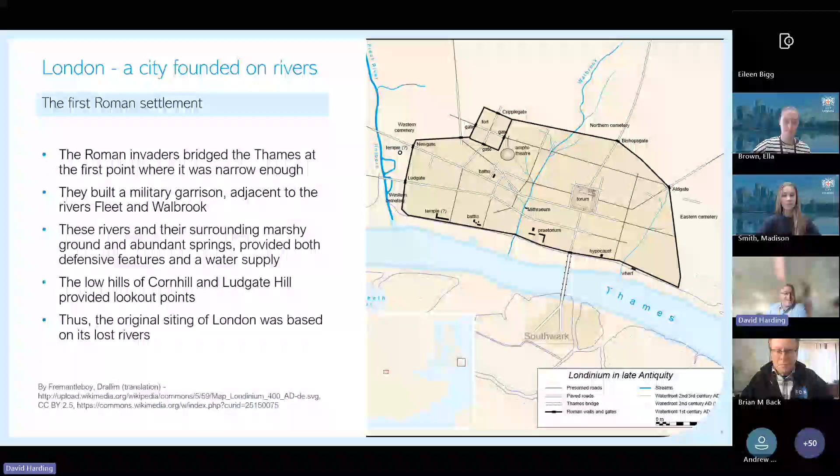So the two rivers and the abundant springs provided a water supply to the garrison, but also the surrounding marshy ground and the rivers themselves provided defensive barriers. There are also the two low hills of Cornhill and Ludgate Hill, which are still just about discernible today, that provided lookout points. So the original siting of the City of London was based upon its rivers.

So starting with Walbrook, two sources are given for the River Walbrook. Springs to the north of the Angel in Islington, which remained a source of fresh water via the White Conduit until relatively far into the 19th century. Also the Holywell in Shoreditch, and the name of Shoreditch might derive from an old word for sewer ditch. The Walbrook joins the Thames at Walbrook Wharf near Cannon Street railway station. Its name is believed to derive from the brook by the wall, after the Roman city wall, which it crossed underneath in a conduit.

Administratively, up until and including the Middle Ages, the city was divided by the River Walbrook. There were 24 wards, but they were referred to as wards east of the Walbrook and west of the Walbrook. So it's an example of how the Walbrook continued to have a major impact on the lives of people living in London throughout a lot of its history.

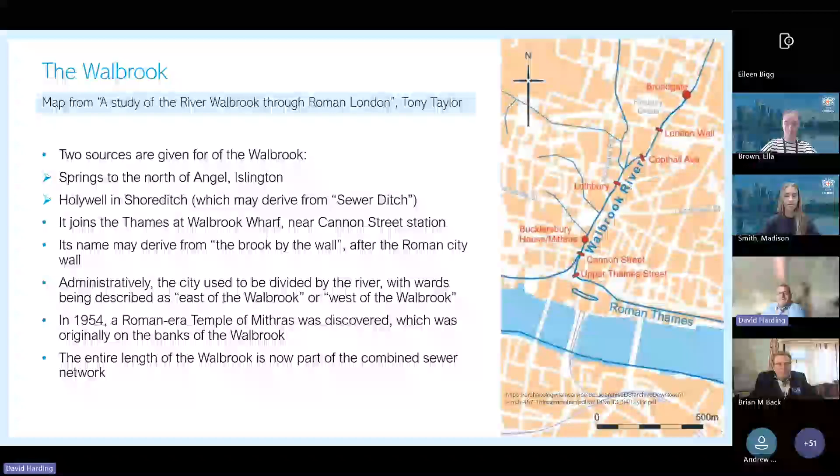In 1954, a Roman-era temple to the god Mithras was discovered, which was believed to have been originally built on the banks of the Walbrook. It's thought that because the cult of Mithras was quite shadowy and mysterious, with all sorts of strange goings on, the secluded river valley of the Walbrook might have provided the ideal location for a temple and for the mysterious rites to take place in. But nowadays, the entire length of the Walbrook is part of the London Combined Sewer Network.

So moving on to the Fleet. The Fleet rises in springs in Hampstead Heath, in an outcrop of sandy heathland soil, which is overlain above the impermeable London clay. It also feeds the famous swimming ponds in the Vale of Health on Hampstead Heath. The upper reaches of the river were originally known as the Holborn, or sometimes the Old Bourne, which gives its name to the modern Holborn area.

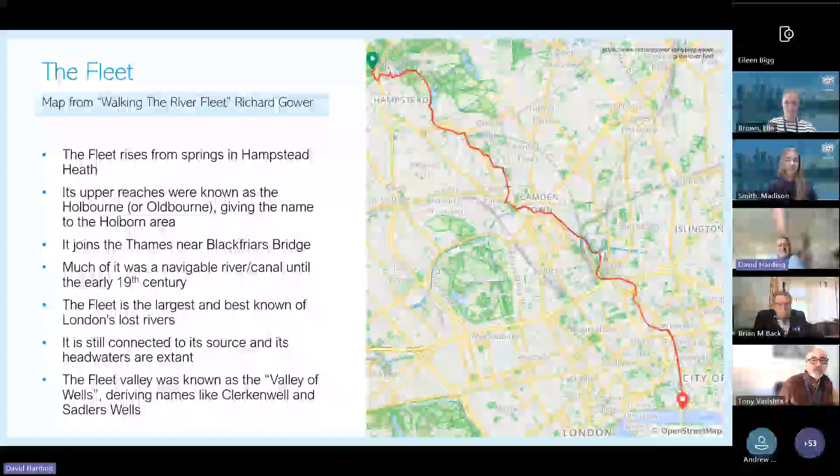And it joins the Thames near Blackfriars Bridge. Much of the river was navigable until the early 19th century. After the Great Fire of London, the lower reaches of the Fleet were turned into a canal by Sir Christopher Wren. And there is a favourite Canaletto painting of ships sailing down the River Fleet into the River Thames.

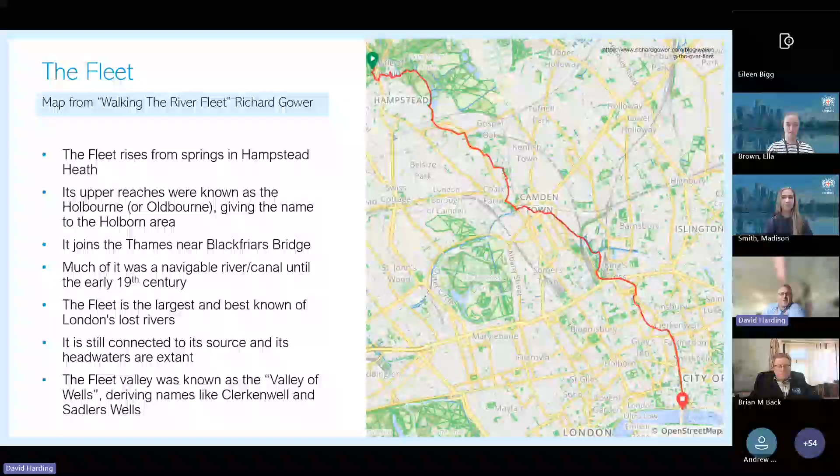It is still directly connected to its sources up on Hampstead Heath, and the headwaters are still extant. You can still see small streams and rivulets on the heath, which feed into the ponds and into the river itself. The Fleet Valley was formerly known as the Valley of Wells, because of the large number of springs along its length feeding the river and also providing water via wells. And modern day place names such as Clerkenwell and Sadler's Wells reflect that history.

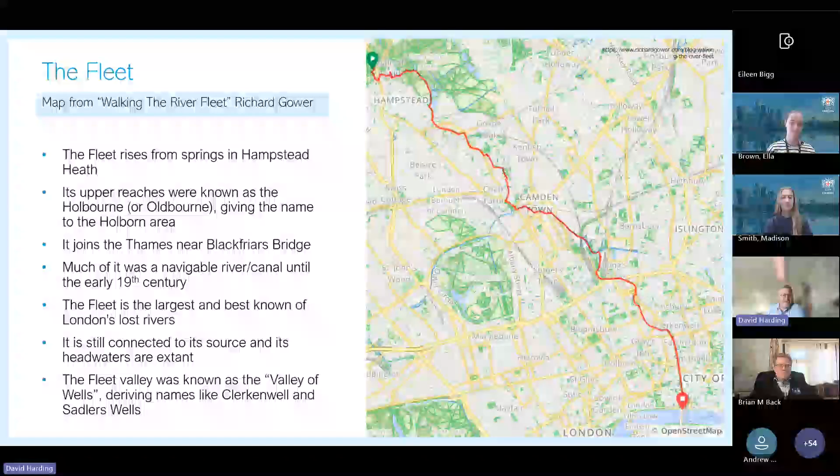The Fleet still has the capacity to sort of bite as a river. During Joseph Bazalgette's re-sewering of London, the Fleet sewer was rebuilt. And at the same time, the Metropolitan line was being built nearby using the same cut and cover technique, whereby you basically just dig a big trench, lay whatever it is you want in the bottom of it and cover it back over.

And then in June 1862, there was a very large storm across London, and the Fleet burst its banks, such as they were, or burst its pipe into the excavations. And the floodwaters were so great that they inundated the nearby Metropolitan line trench and much of the Clerkenwell area.

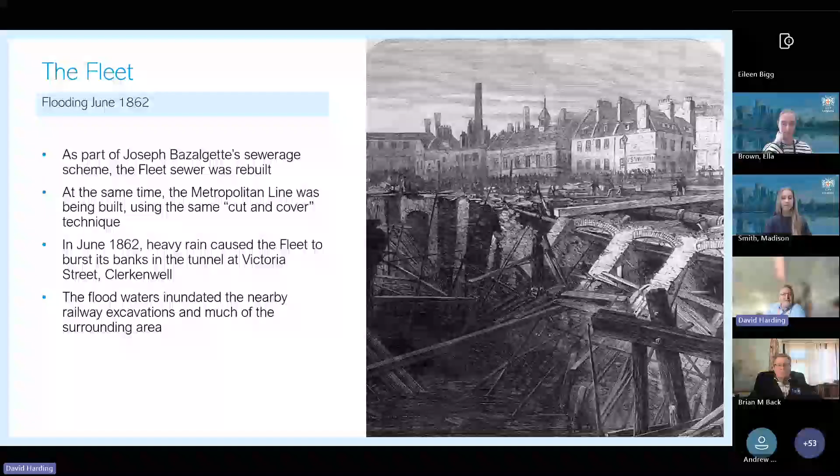And thirdly, the River Tyburn, which also rises from sources around Hampstead Heath in that same sandy outcropping, and a place called Shepherd's Well, and also a source in Belsize Park. It's often confused with the Tyburn Brook, which rose near Marble Arch, which was named after the infamous Tyburn hanging tree, a place of execution, which stood near modern Marble Arch.

The Tyburn is a good example of just how much the rivers and the water of London have been modified, because you have a watercourse which flows in a pipe in an aqueduct, which crosses above the Regent's Canal, a man-made watercourse. To my knowledge, there are no longer any roads named after the course of the Tyburn, but Oxford Street was formerly known as Tyburn Road, and Tyburn Lane. The river also flows through the grounds of Westminster School, where it's long been associated with King's Scholars Pond, which the boys of the school used for fishing and swimming.

On its original course, it split before reaching the Thames, but the main course joined near Vauxhall Bridge. But almost its entire length is now part of the combined sewer network. I say almost because there are traces of springs and wet ground near those sources, and the upper reaches of the river, albeit part of the sewer network, have been prone to cause flooding in certain districts, to the point where there were even questions asked about the possibility of re-daylighting the river and bringing it to the surface. But being part of the combined sewer network, there are obviously certain issues with that.

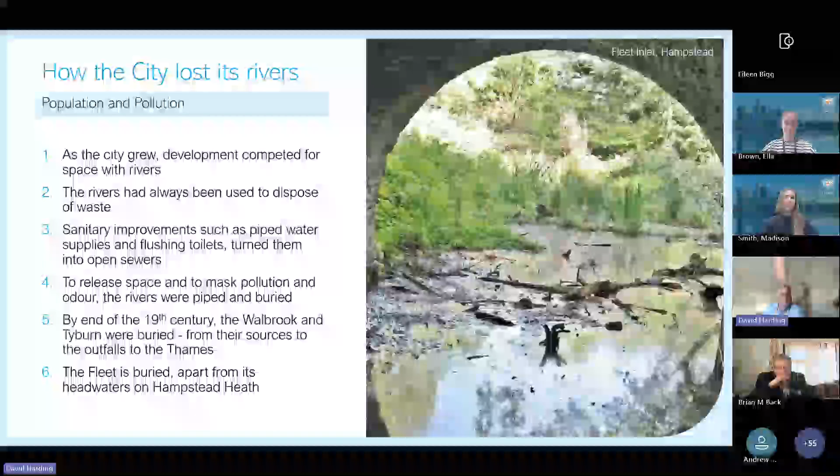So gradually, in order to make space and get the rivers out of the way and to mask the pollution and the smells coming from them, many of them were buried and lost. So by the end of the 19th century, both the Walbrook and the Tyburn were completely buried. The Walbrook entirely from source to outfall, and the Tyburn effectively from source to outfall.

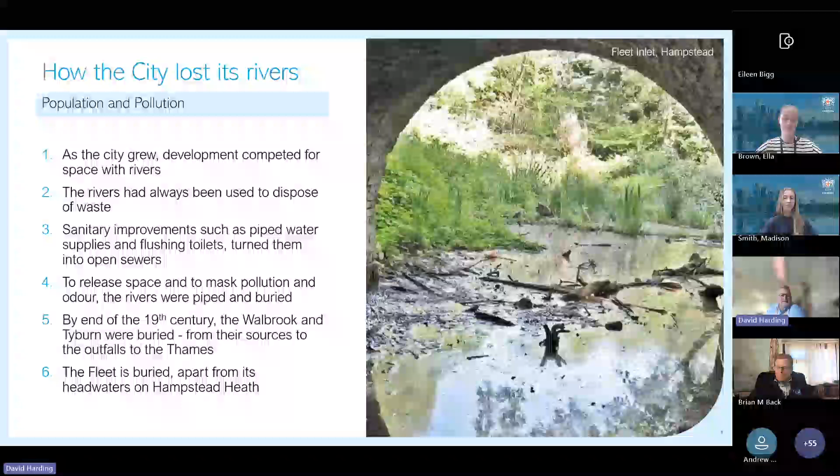And the Fleet is now fully buried, apart from its headwaters and sources on Hampstead Heath. So where are the lost rivers today? All of the ones I've been speaking about are combined into the combined sewer network. Some of them even bear the names of the rivers, such as the Fleet Trunk Sewer, or Fleet Main Line, King's Scholars Pond, after the Westminster Boys swimming pond. And the rivers do flow, but they now only flow into the Thames intermittently following heavy rainfall.

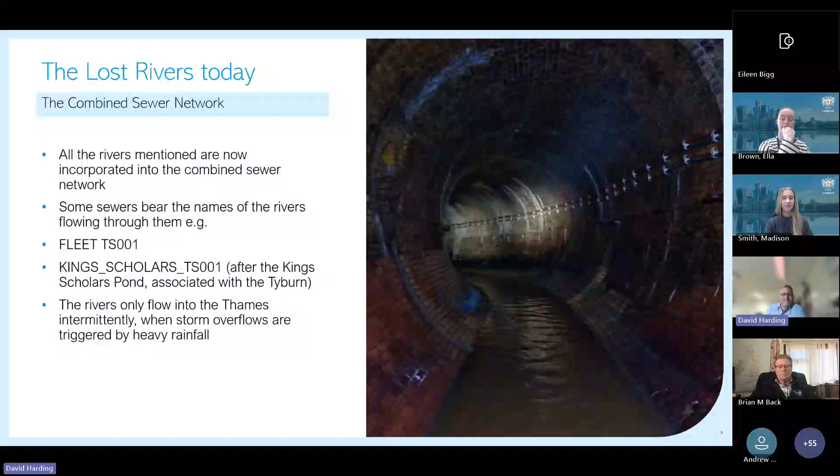So when Joseph Bazalgette built his system of interceptor sewers from west to east, to intercept all the sewers and polluted watercourses that formerly just flowed straight into the Thames, he knew that in times of heavy rainfall they couldn't cope, and to avoid flooding, he built a system of overflows which could discharge into the River Thames. This is why we don't get widespread flooding from these sewers, because of this extensive network of storm reliefs and overflows. However, Joseph Bazalgette designed the system for a population of around 2.5 million. I believe London is in excess of 9 million now.

So as the population grew, as permeable surfaces became more and more paved over, more and more surface water was captured and drained to the combined sewers. So those storm discharges became larger and more frequent. I believe the figure of 33 million tonnes of water per year was quoted. So to restrict those discharges to the most extreme storm events when the dilution is greatest, first the Lee and then the tideway tunnels were built to convey the storm flows to Beckton sewage treatment works for treatment. They're both 7 metres in diameter. The Lee is 6.4 kilometres long, and the tideway tunnel is 25 kilometres long. And the design is that they will only discharge to the tidal Thames between 3 and 4 times per annum.

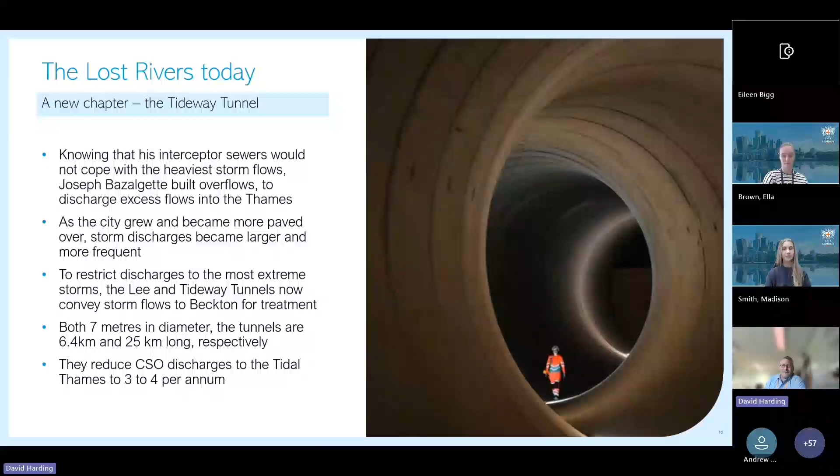So there you can see a map of the main tideway tunnel, going from Acton in the west to Abbey Mills in the east, where Joseph Bazalgette's northern interceptor sewers all combine and join what's known as the northern outfall sewer, which then goes on to Beckton sewage treatment works, which is Europe's largest. There was formerly a large storm overflow at Abbey Mills, which was one of the most polluting. But now all those flows along the length of the tideway, including those from south of the river, are intercepted by the tunnel. And as I say, all storm overflows are fully treated for discharge now, with the exception of between 3 and 4 per annum during very heavy rainfall.

In the top left-hand corner, you can see an example there of one of the interceptor shafts, which intercepts the old CSO outfalls. That particular one is the Fleet storm overflow. And it takes the Fleet mainline sewer and the low-level number 1. It falls into a drop shaft, which then joins the main tunnel and carries on to Abbey Mills. And because the shafts often required the construction of embankments jutting out into the Thames, they've all been designed as public open spaces, sort of pocket parks, and viewing platforms, etc., so that they provide some additional benefit.

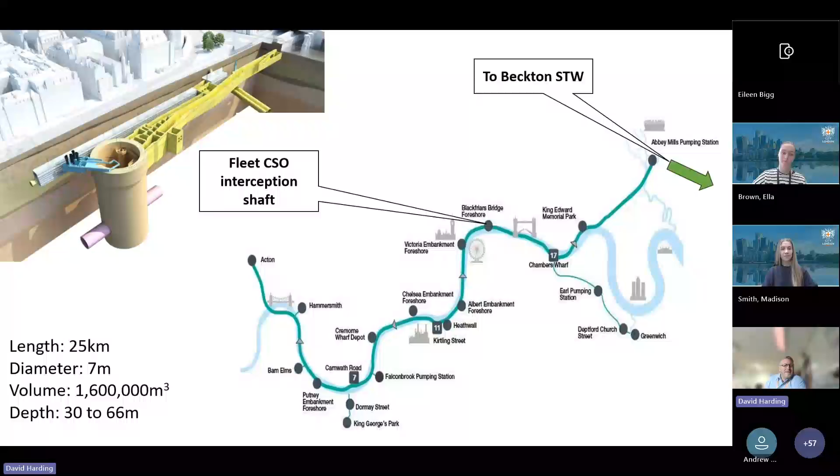So we talked about the lost rivers and what they are now. I'm going to finish by talking a little bit about the flood risk and the role that they play. The surface geology of most of the London Basin is impermeable clay, with small outcrops of permeable strata, such as those sandy ones I mentioned on Hampstead Heath. But this mainly impermeable layer overlays water-bearing chalk, as it shows in the top right-hand illustration. So this geology naturally leads to the formation of streams and rivers with multiple springs along their length, but also marshes and wetlands, which would be the natural geography of much of London. And the lost rivers we've talked about were part of that natural drainage system for the surface water and the groundwater across large parts of the London Basin.

So by incorporating them into the combined sewer network, which was a process that took place incrementally over a very long period of time, the downside of it is that all that surface water and a lot of the groundwater is effectively turned into sewage. And there's only one thing you can really do with sewage, which is treat it. So everything that goes into those sewers needs to be treated. And in large parts of London, including the city, the combined sewer network is the only drainage network for those areas.

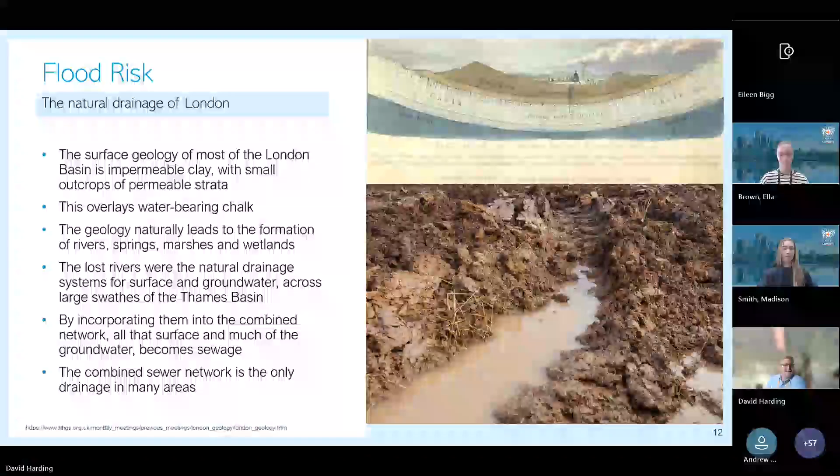So although the rivers we discussed have all been buried and the land above them has been heavily modified, a lot of levels have been raised by the demolition of buildings and the levelling of valleys, there are still traces of all the lost rivers within the landscape. So former river valleys such as the Fleet are still visible. Things like the Holborn Viaduct were built in order to convey transport across the river valley.

And so they can still act as floodplains, collecting and channeling surface water. Obviously, given that the rivers have been incorporated into the sewerage system, the only destination for that surface water is the sewerage system. But when man-made drainage systems become overwhelmed, pipes become full, there's so much water falling, it simply cannot get into gullies and drains. Flooding occurs.

Another consequence of a lot of those sewers having once been rivers is that they're quite near the surface. So anything that's built underground, such as basements and the Underground, is therefore quite vulnerable to flooding from them. And back in July 2021, on a single day, more than 1,000 properties, many of which were basement properties, flooded, and also London Underground stations and tunnels.

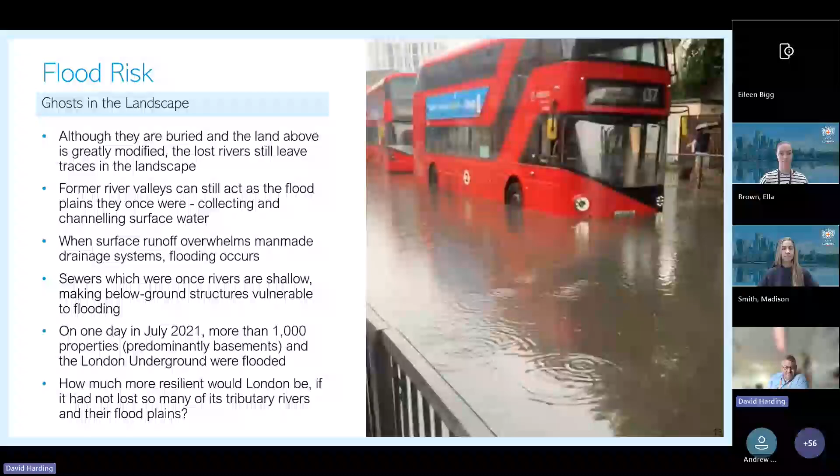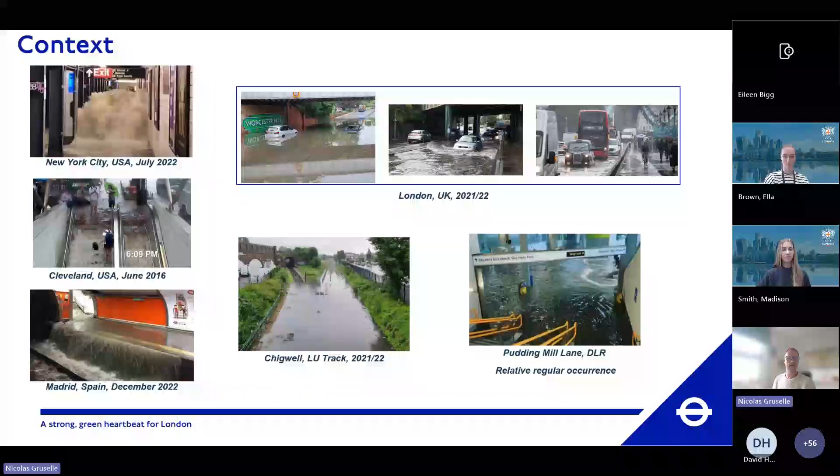And in 2022 in Madrid, and more in particular in 2021 and 2022, which David has alluded to, the flooding, in particular in 2021, where we've been quite severely impacted in surface, obviously, as you can see on the pictures, but also on track, in our tunnels and our stations. And I think that was another wake-up call for us to accelerate our resilience and adaptation to climate change, generally speaking.

In terms of the overview of flood risk management in TfL, it's important to understand that we have some duty from a legislative and regulatory point of view to make sure we manage the flood risk, in particular because obviously there is a safety component to it. So there is some national legislation that we have to obey as a transport organization, such as the Flood and Water Management Act. But we also have policy guidance we follow at national, but also regional level.

So we have the Mayor's Transport Strategy that defines the overall strategy in London, and part of that is our strategy to manage surface water and flood risk. And we at TfL also have our own climate change adaptation plan, which we published in 2023. And this one definitely has a strong focus on flooding in particular. The other risk is heat, and they are the two pillars that we have to work with.

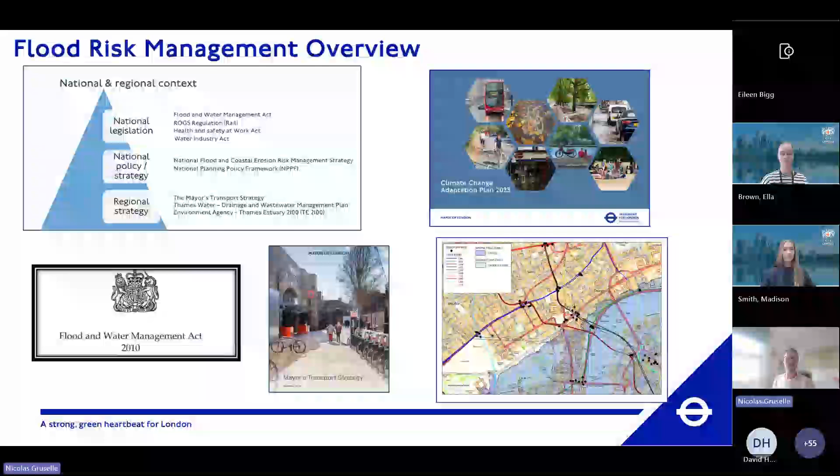So focusing on our tunnels and underground infrastructure, which was the topic of today, just to explain that we have two types of tunnel at TfL. We have the subsurface tunnels. Those will be basically for the Circle Line, District Line, Hammersmith and City, and Metropolitan Line. I think Dave mentioned that as well. They are just below the surface. They've been built as cut and cover: just open a trench, put your tunnel in and cover.

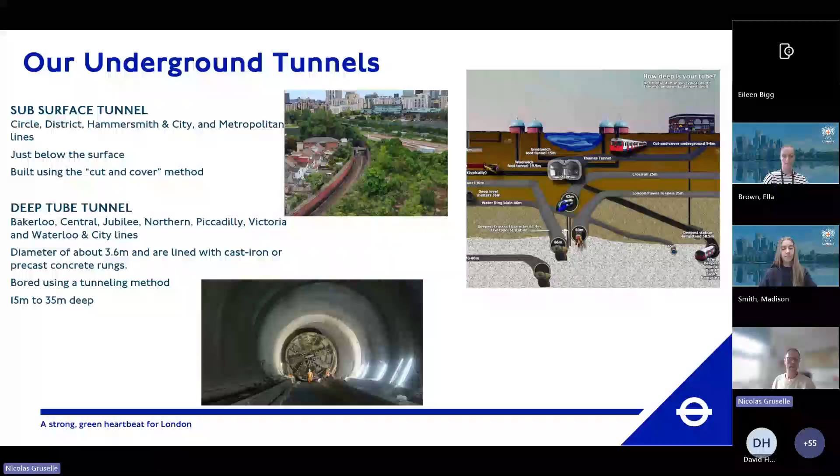Then you have this thick layer of London clay, which in theory is supposed to be impermeable. And usually our deep tube tunnels will be built at the bottom of this clay or below it. And then you have the chalk. The deep aquifer sits in the chalk, usually much lower than the tunnels. So if the deep tube tunnels are subject to water ingress, it's actually not coming from the deep aquifer, it's coming from the shallow aquifer, because hydrogeology is quite a complicated science, and you do have some links. Usually we don't fully understand exactly where the passage is, but the shallow aquifer finds its way through the London clay and therefore impacts our tunnels.

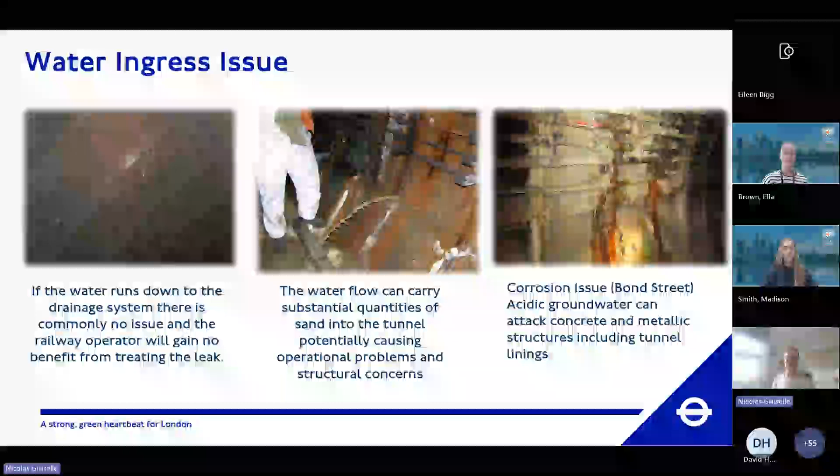And actually quite often it's more the composition of the water coming in that's an issue. Because of where the tunnels are located, as I've explained on the previous slide, quite often we have not only water coming in, but quite a large quantity of sand, which is just sitting in the tunnel and could impact our infrastructure. So sometimes controlling and managing the water is actually okay. The problem is silting up all our channels and pumping stations, and that could be an issue.

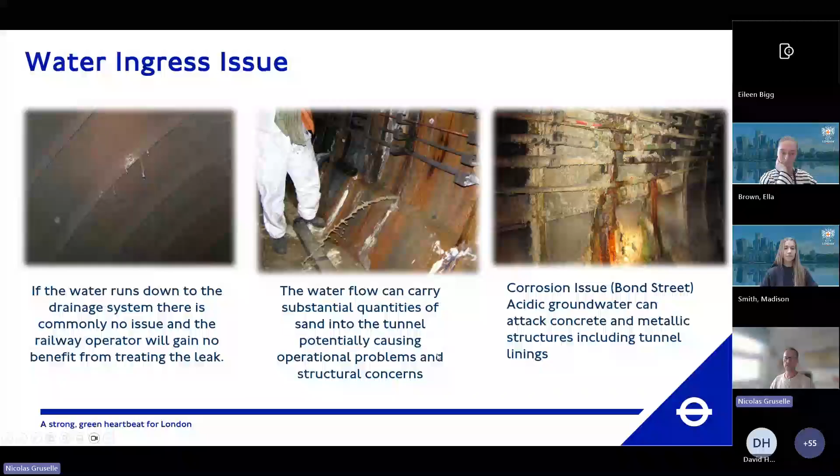Another issue could be corrosion. So sometimes, for complicated chemical and geological reasons, the water is actually quite acidic and is creating some corrosion issues on our infrastructure. As you can see on this picture, it's quite obvious. So these are the sort of issues we have to deal with pretty much every day.

So at some point we'll have to release the water back to the surface. We have a large number of pumping stations, approximately 1,500, which are discharging tens of thousands of cubic meters of water every day, which is fine. That's the way it has been designed, and yes, we do have to renew and upgrade sometimes, but that's fine.

But sometimes, as I've explained before, it's just not manageable because the drainage system is overloaded or there are too many problems in terms of corrosion or sand coming in, and then we have to have more radical intervention, which is basically grouting. So we grout, usually using acrylic grout, underneath the tunnel lining, to basically plug the leak. The problem with that is quite often, if you stop the water coming in somewhere, the water will find its way somewhere else. So it's not our preference. We would always try to let the water come in and manage the water. But sometimes we do have to intervene, and then we need to make sure it's done in a very controlled way.

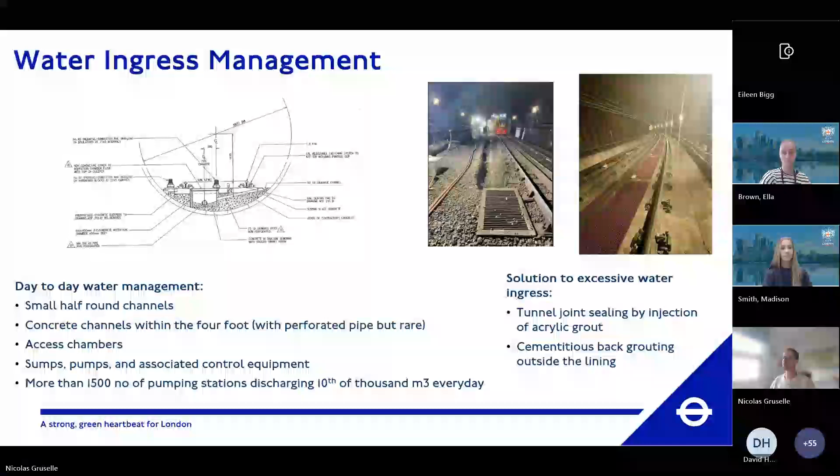This slide is just to explain that water ingress is an issue every day. But in terms of flood risk, the main risk on our underground infrastructure is actually from surface water and water main bursts, as I've mentioned earlier. If London is flooded at surface, the water could find its way into our tunnels through station entrances, a number of shafts, or tunnel portals; you can see this picture here, for example, it just goes through the tunnel. And that's really the main risk we have.

And we have a number of ways of mitigating that. In most cases, we actually have more operational mitigation measures. So we have a number of protocols, such as an emergency response unit team that is put on call if we have a warning from the EA or the Met Office.

They have temporary pumps to deal with that, just to make sure we can react very quickly and recover as well very quickly in case of flooding. And we also have some more kind of engineered solution. So I've put a picture here of what we call passive resistance. Passive resistance will always be our preferred solution. It's basically building something high enough so it's not impacted by flooding when you design it.

But obviously on existing infrastructure, you're not going to start lifting all our station entrances. It's just not possible. So we might have some time to put more kind of floodgate type, which I've put a picture here. It's not ideal because although it's a relatively simple infrastructure, you have to make sure you have the right procedure in place, the people on site, the right training, the right competency for the people to intervene at the right time, the sufficient warning system as well, evacuation protocol. So all in all, it's actually not a simple solution overall, but sometimes we have to put one in place.

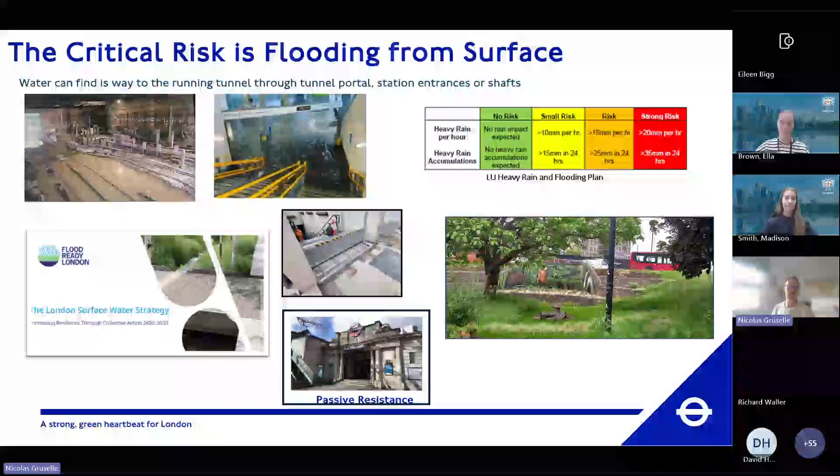They are just such a lovely infrastructure and way of dealing with flooding issues. And not only do they provide flood risk resilience, but they're obviously adding benefit in terms of biodiversity, water quality as well, which is more and more high up on the agenda, and amenities, just the feel and the difference you can make by just building rain gardens in London. They are just win-win-win solutions. I would just leave it like that.

As conclusion, just a quick reminder of what I've been through. So we are managing a wide range of assets above and below ground in TfL. We understand our flood risk. We have a project ongoing, business as usual, to make sure we understand the risk, and then we can make informed decisions when it comes to mitigation measures. Most of them will be procedural, but we also have hard engineered solutions sometimes. Our tunnels are supported by drainage assets to manage water ingress, but sometimes it's just too much, or the wrong composition of the water coming in, and then we have to intervene, usually by grouting.

And then I think the key takeaway probably is understanding that the main risk is actually coming from the surface, and that we need to treat that as a common problem, all of us. I think this workshop is probably part of that as well, just to raise awareness and make sure we all work together. And I think SuDS, sustainable drainage systems, will be a big part of the solution. I will leave it like that.

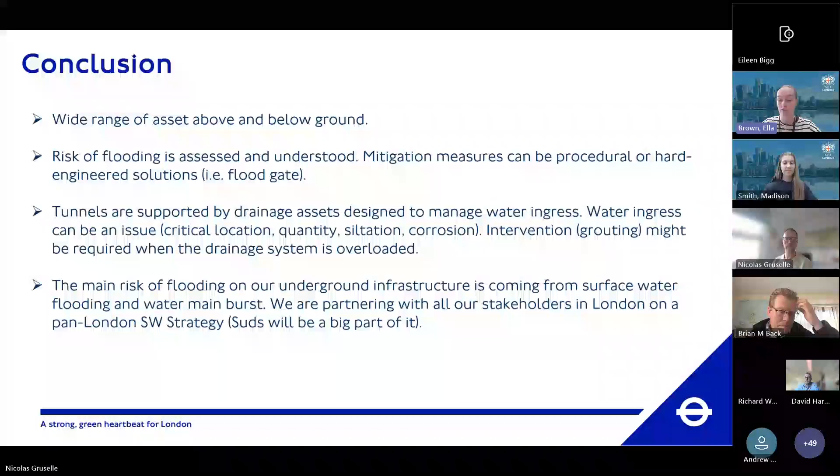We've already had a few in the Q&A, so I will start off with a question around the City wasting or not recognizing the resource that rainwater can be in terms of capturing it within grey water recycling services within buildings. This particular question asks about Thames Water having a policy to create incentives for buildings to disconnect their surface water discharge. If I may, I might just quickly speak on the side of the City, just to say that within our planning policy, we do have policy and supplementary guidance to encourage developers to consider integrated water management within any new developments.

But David, I don't know if you have any more to say on what Thames Water are doing to incentivise integrated water management? Yes, I mean, there's always been the option to disconnect your surface water from the public sewer network.

It's not a huge financial incentive. I think for a typical domestic dwelling, it's around a £30 or £40 a year reduction in the bill, but over a long period of time, you know, that would accumulate.

I think, yeah, there are obviously challenges within the city in that, as I talked about, with the geology, infiltration can be difficult, but it's not impossible, because if you disconnect the surface water, what do you do with it? Infiltration can be a challenge on the clay, but it's possible. Obviously there aren't any watercourses because they're now combined sewers in the city.